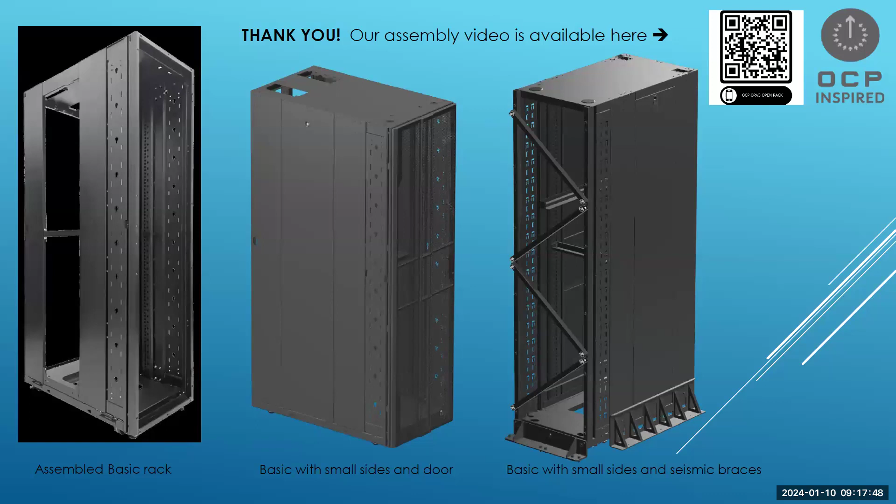And this is a simulation of when it's fully assembled on the left-hand side. And then we have just a couple other images. I just threw them in here to show the same rack with the small side panels, and then another one showing some of the seismic braces.

So I've added a QR link that'll take you to the video where you can actually watch our people assembling it. As I said, there were 3 people doing it. It clocked less than 25 minutes. And as I said, this is a conservative time frame. It certainly would take less than that if you were to set up an assembly line, a pretty basic system. You don't need a whole lot.

We do not require special jigs to do the assembly process. It's kind of self-aligning. You don't need any really special tools. The hardware is mostly standard Torx bolts. You don't need anything special there. And then at the end of the process to verify the alignment, we have a simple go/no-go type jig. So that's what we developed,

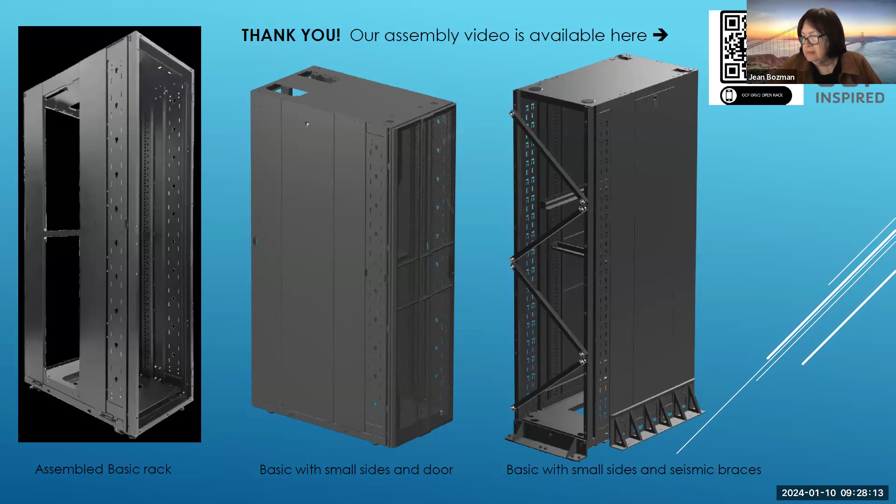I'm just saying that they may have some expertise that could be helpful. Well, that's another point too, because not everyone requires a certification. Some people just want to know that you've actually tested it. Right. And I mean, in our facility, we can do a static simulation in the NEBS testing. There is a static portion of that where you simulate a side pull. So we can do that, but obviously we don't have a shaker table in our facility.

That's a highly specialized piece of equipment. And that's why I mentioned, who knows, but maybe Berkeley or UCSD or UCSB might be able to help there, and also their students would get some experience. Just a thought. Interesting.

I'll send you a message. Okay. Sorry, I have to go soon, but I wanted to get that in. Okay, great. Thanks.

Another quick question. Yes, please. I pulled it up on your website, and it says compliant to or conforms to the OCP OpenRack v3 release 0.2 specification. And so I just wanted to test that. I don't recall what changed from 0.2 to the final 1.0 release, but is there anything that I should be concerned about there?

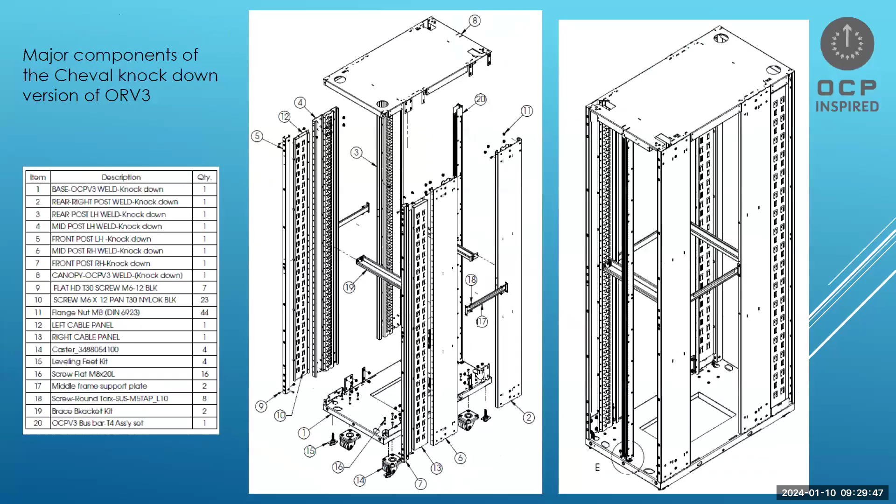I don't think so. We can review any particular details. As I mentioned earlier, if I refer back to this table here, the static load unpackaged test, 1,400 kg, that is coming from the Meta Frame V3 spec from July 2023. And then for the dynamic loading test, 1,000 kilos, that one we pulled from the Google implementation V3, and that is from September 2022.

I believe in the OCP, there is a spec from revision 0.1 from 2019, and I think that was 1,600, but I can't really comment on why it's changed. But be that as it may, given that there are different requirements, we're willing to work with anyone. If you have particular tests that you want done, then of course we'll try to work that into it as well.

If I recall correctly from the videos, Rittal dropped it from 1600 to 1400 because during the 10-degree test, they were having shelves pop out at 1600. It's that and the front impacts. So the 1 millimeter per second front impact, the equipment was ejecting at 1600 kilos. That's on the ISTA testing, I guess, right? That's right. Okay. Yeah, we haven't done that part of it yet.

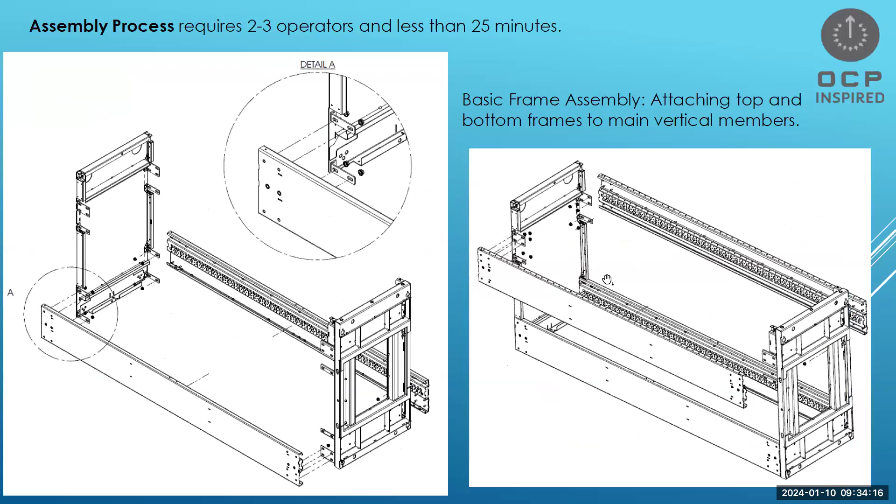I have a concern as it relates to the knockdown version of the OCP rack that has the vertical bus bar that goes up the back side. I think a couple pages up we can see that. There you go. Down one. There it is right there. The bus bar has to be accurately located left to right because of the nature of the first mate, second mate, as well as how rigidly the servers or the power supply unit would be in the rack.

As those mate, the connector that mates to that vertical bus bar has a significantly tight tolerance, so that the first mate, second mate, and the grounding clip that's on that connector is located correctly. And often there'll be a fixture that holds that vertical bus bar in place, or is used when it's mounted, as we'd see in detail E here. So I'm concerned about the left-right placement of the vertical bus bar, like you'd see in detail E, that that mating piece for not only the servers but the power supply would be lined up.

Okay. Is that component you're talking about used all the time, or just for transportation? You mentioned a stabilizing component or a bar. Is that what you were talking about? Well, in the as-welded assembled part, there may not be a need for that, but on the put-it-together, make-it-yourself one, the knockdown shipped one, that bus bar would be an independent piece and would be screwed in like we see here in detail E.

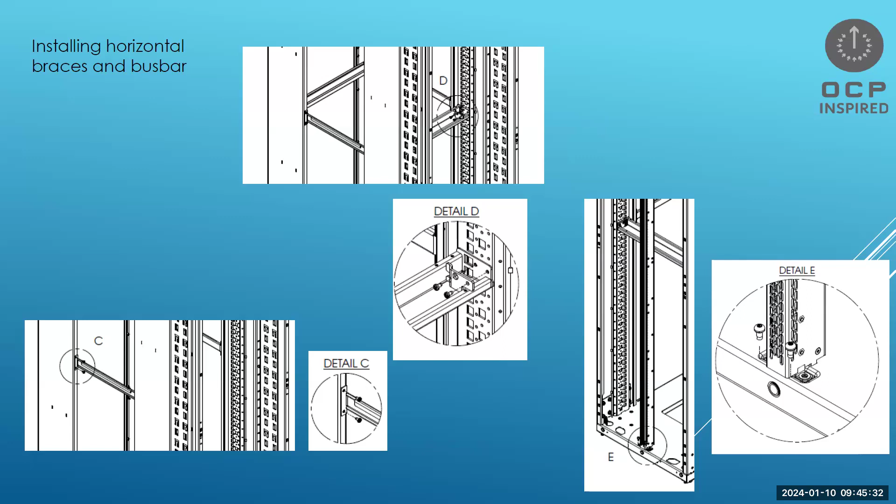So I have one quick question, if I may. What's the build tolerance or the accuracy tolerance once the manually constructed version is put together compared to the manufactured welded version? Is there a significant difference in the tolerances for fit and accuracy of placement of things? No, it's going to be pretty much the same. Otherwise, the equipment won't fit in there. So we have to maintain the same tolerances, whether it's the welded version or this knockdown version here.

I did not show it, but when we do the testing, what we've got here are just the top level results, okay? But they'll take multiple measurements from the front and the rear on the side, before and after the test. That data is not here, but we check all that. And between the welded frame and the knockdown frame, there's no real difference.

I can refer to the EIA racks as well, because there you have quite tight tolerance between the rails, and those have to be very precise. This one is a little bit bigger than that, and you're not using the 19-inch rails quite as severely, so it's a little bit looser. But between the two, it's the same. In fact, the welded frame is probably a bit more difficult because you've got one large piece to control during the process, and many factors that can affect the dimensions during manufacturing.

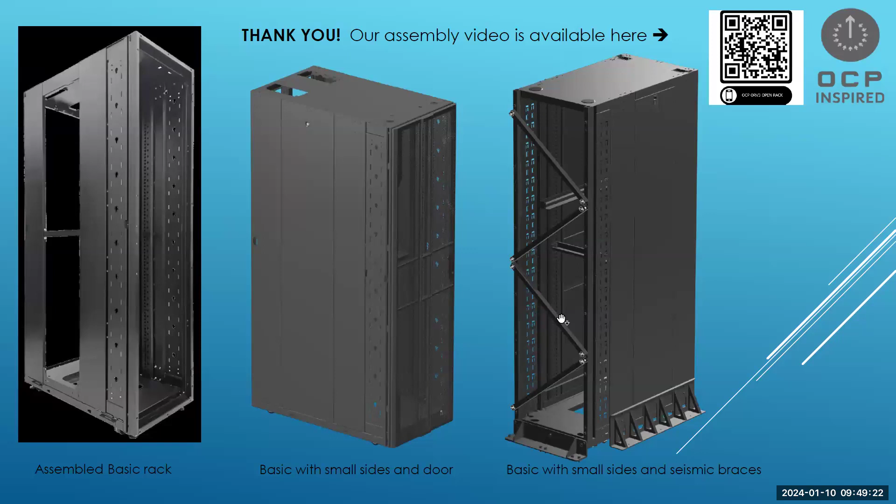The braces you're referring to are these braces here. No, we're not using the braces. This is for the seismic bracing, and we did not test that one yet. I was thinking not so much of the seismic braces, but the horizontal. If you go back to the breakdown diagram, there's some mid height ones. Yeah, this right here. Yeah, I believe they're... I can't tell from this picture. I would think that they're in there.

Now, of course, you've got these shelves in here. These are obviously very strong shelves to support the weight. But you have to have them, otherwise you can't do the test. But there's nothing else in here other than what's specified in the bill of material. There's no other braces. There's no other structural support to the rack. It's just as it is.

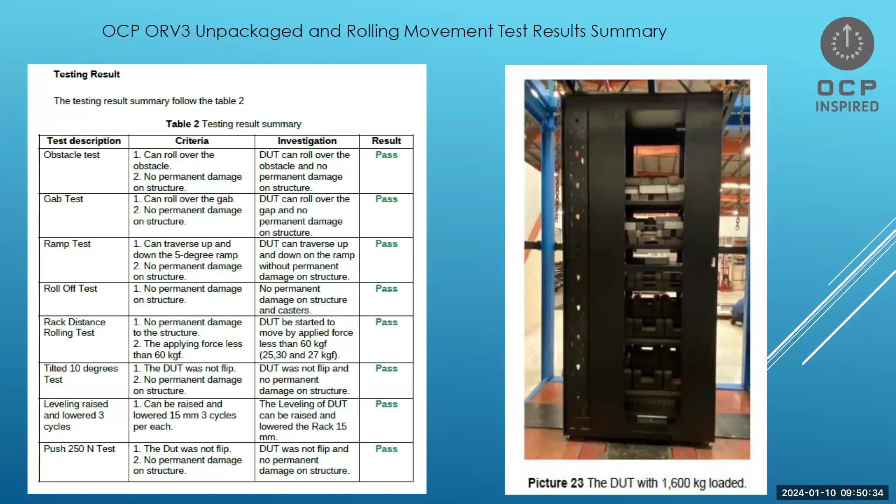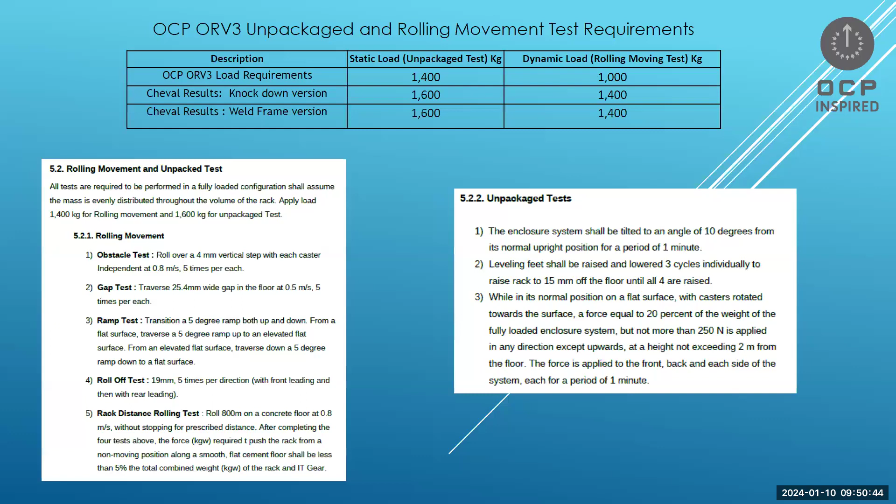And you can put more, but we don't really want to push it. So that's where we stop, at that number. And that's what you would stack in your warehouse too. So we would advise not going over 5 on one. If you have racks in your warehouse, yes, you can do multiple stacks of 5. But this is a very heavy duty carton material, and then also the wooden pallet as well.

Okay. I think that was great, Steve. Lots of questions there. Thank you for spending the time answering all of that for everyone. Well, I wish I could have answered all of them a little bit better. I'm sorry I didn't have some of the information, and I apologize about the website. I'll deal with that, and thanks for your patience.